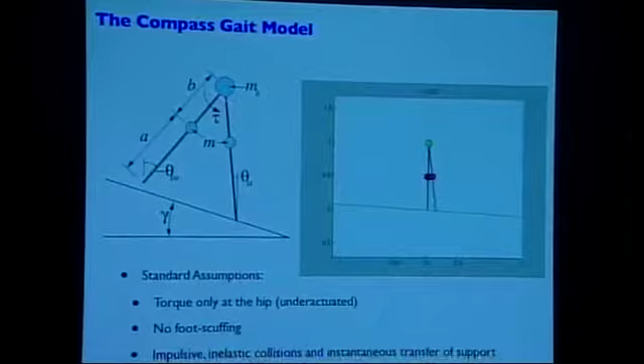And what I want to do today, actually, is try to convince you that motion planning is really central to the way we should be thinking about dynamic walking. And I hope maybe, instead of being on the not list, it makes it to the things we do talk about every meeting. We'll see. But I want to try to make that argument to you by using the model we all know and love and we've been talking about a lot this week. So your standard compass gait model, which, as we know, has a stable limit cycle down the ramp with the standard assumptions. I have only torque at the hip, so no torque at the toe.

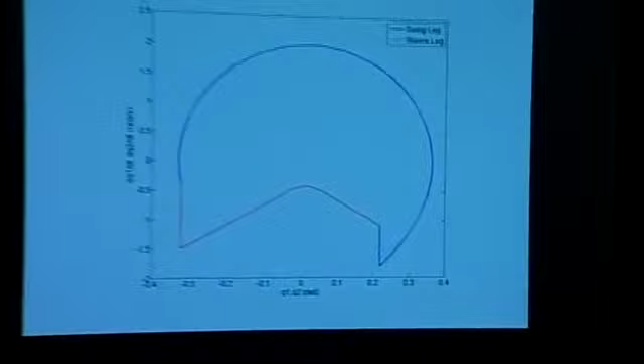Okay. Let me tell you about why you need motion planning, maybe, by just trying to articulate what I care about from the control system, my goals for control. So the first thing we should have, I guess, is this is the nominal limit cycle of the compass gait walker. We've seen it a couple times now. The first thing I'd like to do is make this nominal gait very, very robust to initial conditions.

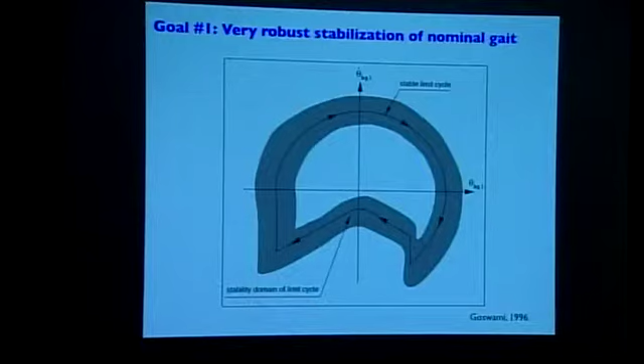So right from Ambarish's paper many years ago, he cartooned the limit cycle of the compass gait, and we all know that the passive compass gait is relatively fragile. It can only recover from small initial conditions. And we've got a lot of good control approaches now for making that bigger, but I really want to fill up the entire space as much as I can with the control system. I want to have it as robust as the system is capable of being.

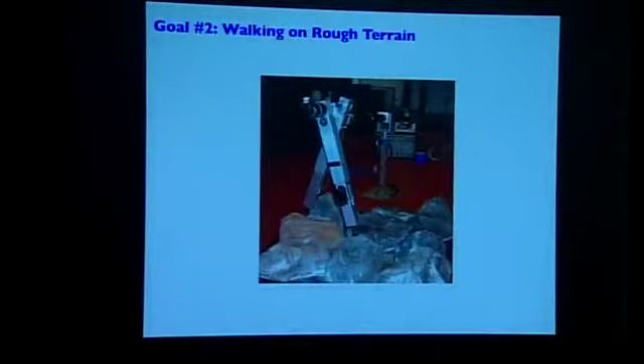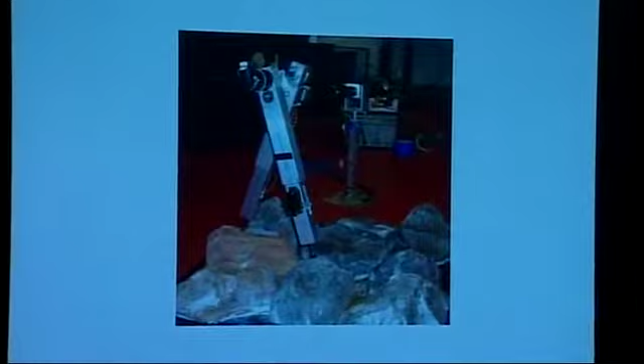A second goal for the control system would be to walk on rough terrain. And this is a picture of some work that Fumiya Iida had done in our lab. And Katie Byl was also working on walking on rough terrain. And that certainly motivates motion planning. And my third goal for these walkers is efficiency, but really it's a distant third. I think that my answer to efficiency is maybe about what Jesse said too, that we get the stability first, we'll use trajectory optimization to get the most efficient gait we want to stabilize, but I think first you have to be stable and then we'll worry about efficiency.

Okay, so why are those challenges hard? And we've heard it in a couple different varieties. Here's my answer. So the reason I think walking is hard to control, it's not hard to stabilize, Andy, but it's hard to control very, very well because of the dynamic constraints. First of all, we've been talking about underactuation, which means you can't follow arbitrary trajectories, but maybe an even more dramatic constraint are the power limits at the actuators, which manifest themselves as either torque or speed limits or both. And those can really, really dominate.

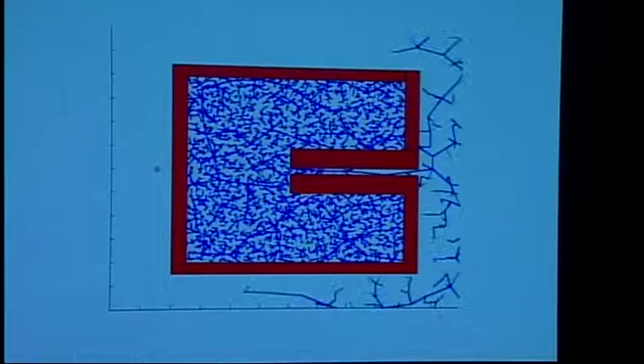So rapidly exploring random trees, and I'll tell you how they work, but this visually will tell you how they work. They're more exhaustive computational approaches that try to fill a space with feasible trajectories and will eventually find their way outside of even a bug trap and make it to a goal. And these algorithms, unlike the trajectory optimization, throw out optimality at first blush. People have been trying to put optimality back in.

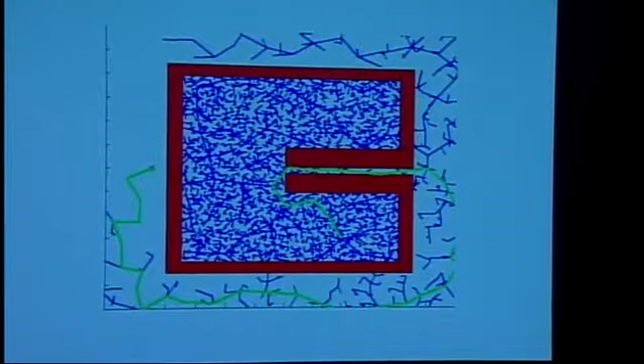But they have strong notions of completeness, saying that if it's possible to get from some initial condition to the goal, then this will actually eventually find that path, or at least with probability 1 as time goes to infinity. Okay, so this is a good set of tools to add to the library. Now this is not much dynamics in this example, but let me show you that it does work with dynamics too. Okay, so here's the basic algorithm. You can understand it very quickly.

And this algorithm does exactly what I showed you on that last slide. It'll start quickly populating the space with these fractal-looking trajectories, and will find its way eventually through nooks and crannies and get you to the goal. Okay? And the immediate knee-jerk reaction that I hope you have is that there's no way that's going to work in high dimensions. And the answer I can give you is only anecdotal, but it surprisingly works well in very high dimensions.

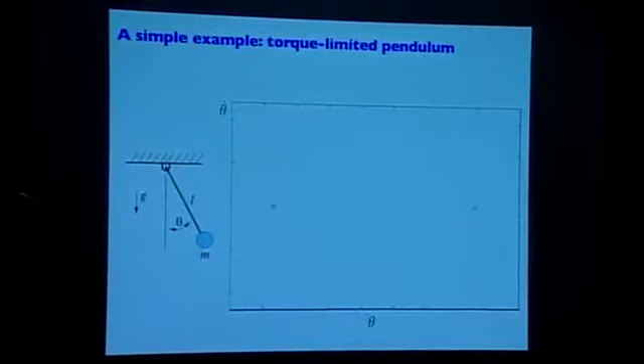Okay, so I gave you a pretty kinematic example first. Let me give you a more dynamic one, although a very simple one. Imagine now a simple pendulum with a torque at the base, and we just want to take this simple pendulum and swing up and balance at the top. But we're going to impose torque limits, for instance. Now this actually you could probably do with trajectory optimization. With a good initial condition, your trajectory optimizer might find a very good path straight to the top. But let's say we want to do it with a more complete method.

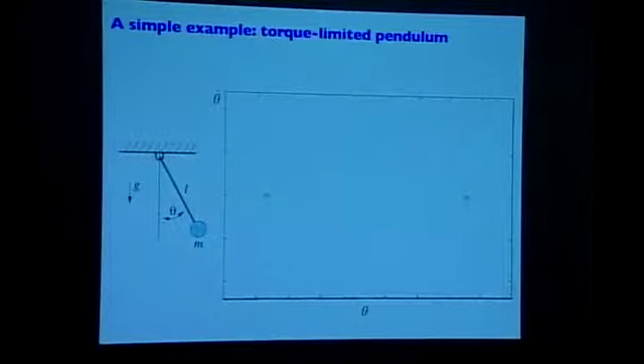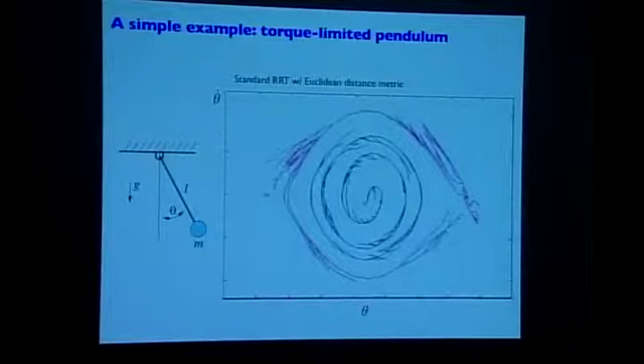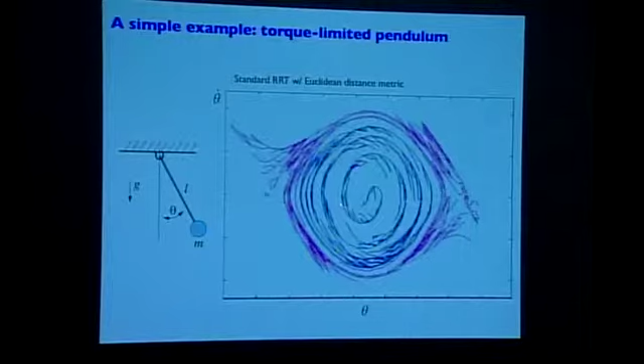So we can take that rapidly exploring tree and grow trees. In the good cases, you tend to grow them backwards from the goal as well as forwards. This is the state space of the pendulum, theta versus theta dot. This is the down. This is the top configuration wrapped around because it lives on the cylinder. Okay, and these trees will grow out in random directions. And because every edge of the tree represents a feasible trajectory, it naturally starts expressing the dynamics of the system, right? So this is the eyeball that you all know and love from a simple pendulum. This is the natural dynamics of the system expressed out of a very random algorithm, okay? And they'll eventually connect up and find you a path, if it exists.

Okay, but actually the initial algorithms as proposed don't work that well. And in fact, if you spend enough time doing it, you look at it and you see every time you pick a random point, it kind of picks the wrong node to expand from. You start feeling it's pretty inefficient. There's a lot of things that could be better about it. So there's been a handful of work we've done and other groups have been doing to try to make them work better for systems with dynamics living in state spaces, which have natural tendencies to, for instance, go clockwise around the phase portrait. And there's a number of heuristics that you can do.

So you can try to improve the way that you sample random points. You can try to improve the notion of which point is closest. You can try to extend in a way that's more natural. And we've been exploring all of these. Let me tell you quickly about two of them. So Alec, who's in the audience here, has got this very clever trick for changing the sampling distribution. It's very inexpensive to implement, and effectively the problem with growing these things in state space is you end up trying to grow in places where you just can't get. So for instance, you just keep asking it to get to the top and it's only got enough energy to live down near the bottom, and it's annoying.

So what Alec has done is come up with a way to sample only from the green regions in this plot, which are a local estimate of places where the pendulum can move in a few samples. And it's a moving target, but we come up with these sort of moving sampling distributions which guide the expression of these dynamics so that they're considerably more efficient for dynamical systems. How do they choose the green tree?

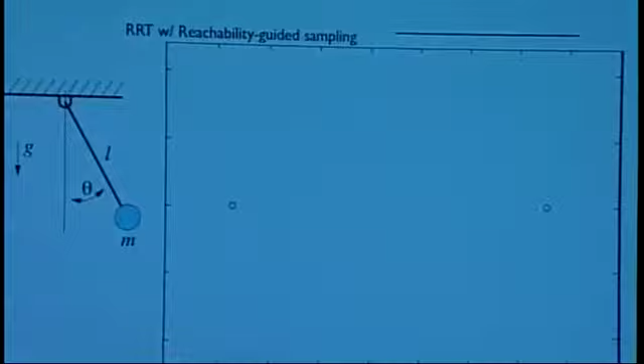So actually he grows two trees. He grows the nominal tree that you're planning with, and then every time he expands, he has some local estimate of the reachability for that node. And if you're closest to the boundaries of your reachable set, instead of closest to the existing tree, then you're in this green Voronoi region, which means you have room to grow. Yeah. And this is the growing oscillations you're showing there. It is, it's for the pendulum case.

It's being pumped. Yeah. And why is it trying to pump up instead of pump down? It's just trying to sample new regions that it hasn't been near before? That's right. It's biased. There's much higher probability of sampling from a place that's not near the origin. So it has this natural tendency to fill the space.

And then actually after that has happened, it's got this nice property that random samples are just as likely to extend the ones that are close. So these things sort of fill the space quickly and then fill in the details later. If you watch them enough, it has that behavior. And little tricks like this can make a big difference to the performance of the algorithm.

Okay, so Alec's version of the simple pendulum plotted versus just a standard RRT. This one cruises right up and finds a goal. This one's still just getting started. And there's a handful of tricks you need to do. All I mean to really say is that with a little bit of tricks, you can make these things work very well with dynamical systems. It works. Alec can also solve these bug trap problems in a blink of an eye in a few trajectories using similar kind of heuristics.

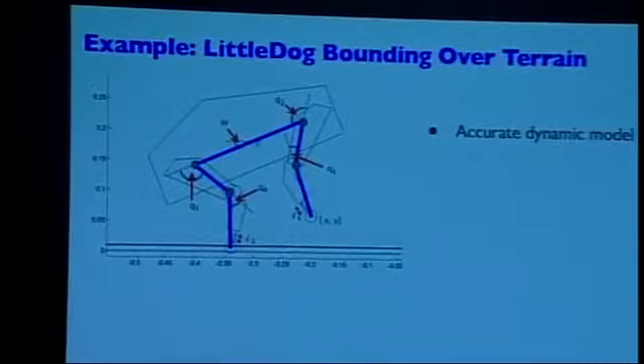Okay, so let me show you a harder example. So we can do this, for instance, on Little Dog. So we take the Little Dog model. We spent also a long time doing system identification for Little Dog, but we came up with a pretty good model. I'm not sure if we'd say we like it as much as yours, but we came up with quite a good model. It's a planar model, so we just ignore the out-of-plane dynamics, a 5-link model. We model the ground reaction forces very carefully and the dominant effects of the saturations at the joints and the reflected inertia of the motors.

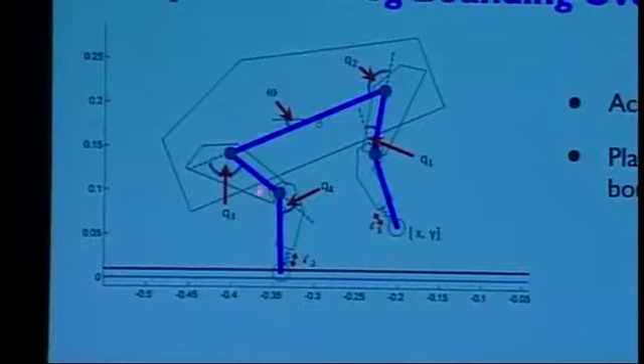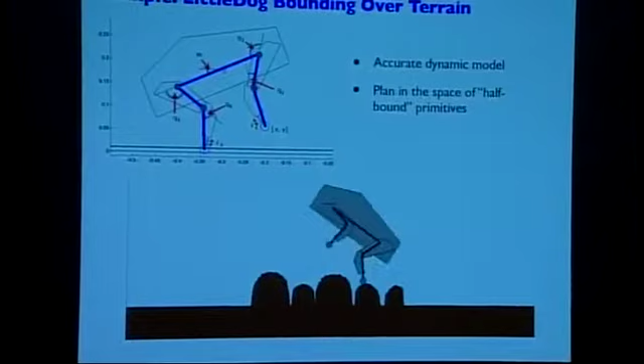Okay, and then we plan in this high-dimensional space. It's a total of 14-dimensional space that we're planning in. There's some primitives that we use, so we plan half bounds at a time. And we can now take Little Dog and very quickly plan pretty complicated trajectories over surprisingly non-convex terrain. So this is just a system. It says you've got a robot. It's described by these following dynamics. It's got these kinematic constraints. Initial conditions here. Final condition is here. Go to it, and it fills up the space and comes up with a trajectory that gets you over the obstacles.

Do the actuator limitations in the simulation match the real world? Oh yeah, we spend more time on that than anything. That absolutely dominates. And actually, we do delays in simulation and everything like that too.

Okay, so another key idea is to improve the way we do the extend operation. So for instance, everything you learned in trajectory optimization the other day: nowadays, every time we do a little extension, instead of growing some epsilon towards your goal, we actually do a trajectory optimization during every extend operation. That makes a huge difference. Okay, but the take-home message is really that these randomized algorithms can find solutions in pretty complicated dynamic problems.

And the practical way you see that is just when you start integrating back the solutions for this, the numerics of the problem are very, very bad. And you take out one dimension and suddenly the numerical conditioning is very, very good and the controllability and the system works much, much better.

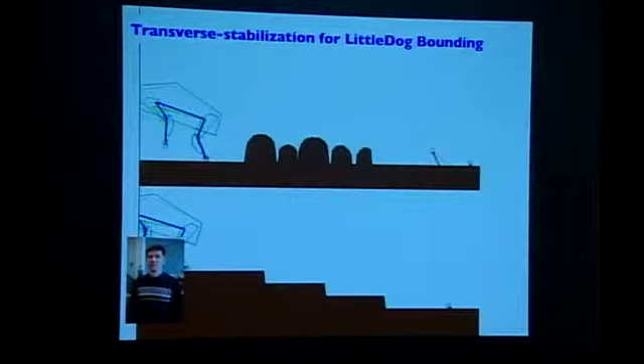Okay, so Michael's been showing you can do the transverse linearization even on these complicated models on Little Dog. Now you might be able to guess this is the one that wasn't transversely stabilized. The green one I think was the original and the blue one was the stabilized one. Okay, so in pretty complicated regimes, with that one, by the way, the dog is getting perturbed. There's an adversarial perturbation. Every time the foot hits the ground, someone's trying to throw it back up with some pretty big perturbations, and there's delay in the model and everything too. And it's still very robust. Much more robust than our initial attempts.

Our use of transverse linearization is just a little bit different than what Anton said. We don't typically use the trick of virtual holonomic constraints yielding analytical transversal coordinates. We do transversal coordinates designed numerically, and we actually spend a lot of time optimizing our choice of transverse sections, but that's maybe a detail. Actually, Anton made some nice points about how if you have it analytically, that can help with the robustness analysis. We don't do that yet.

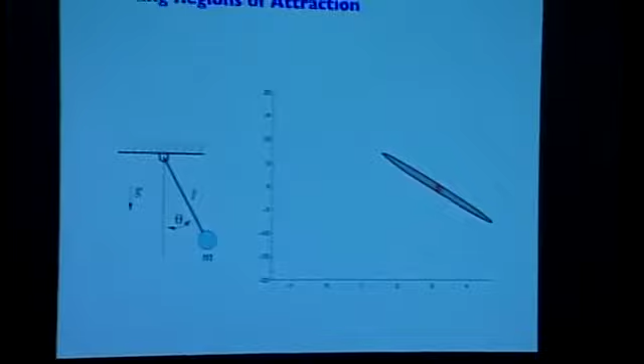Okay, the third tool, I don't know, how many tools have I had? Fourth tool maybe is estimating the regions of attraction. That was prompted nicely by Bobby and other speakers. It's a really, really nice tool to be able to efficiently estimate the regions of attraction of these systems. So let me do it on the pendulum example again.

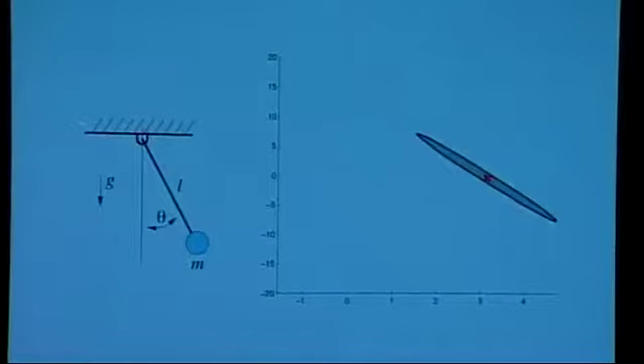So the simple pendulum, if I were to swing up and stabilize this at the top, let's say I just put it at the top configuration, which is pi 0. Is that 0 to you? Maybe my perspective's wrong. That should be at 0 though, okay. So pi 0, so I stabilize the system around the upright. I'll just do it with an LQR, a linear feedback design. But now I want to estimate the region of attraction of that linear controller.

So you know from intro controls that the linear controller works great up here. If you start moving too far away, the sine theta term in the pendulum means that the linear control stops working. So at some point it fails. Actually, the region that it fails is not symmetric because it's better to be over here with a velocity going this way than over here with a velocity going this way.

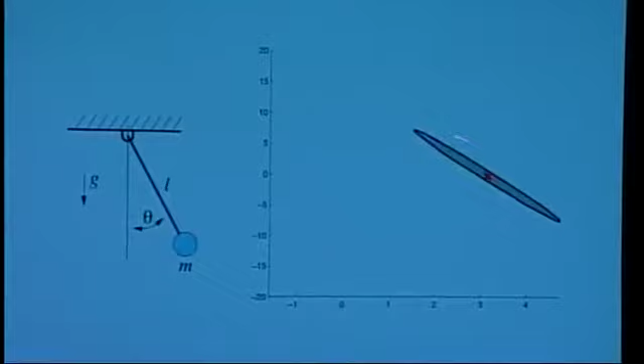It's not a perfect ellipse, but we are going to make our best ellipsoidal approximation of the initial conditions which, when running a linear controller on this nonlinear system, make it up to the goal. And the surprising thing is that we can get that estimate very efficiently now. And here's how that works. So we're going to estimate regions of attraction for linear feedback.

So given a differentiable plant, we're going to linearize around the operating point. We're going to use our LQR design to get a linear feedback. But LQR design also gives you x transpose S x, which is the cost to go for the linear feedback. So if you were running the linear feedback on the linear system, this function is always decreasing. The cost to go will always go down, which makes it a valid Lyapunov function for the linear system. It's a proof of stability for the linear system.

And to estimate the region of attraction, we're going to ask for what region of state space is this Lyapunov function still a valid Lyapunov function for the nonlinear system. So we're going to look for the largest level set of this quadratic function, parameterized by rho, for which all x inside that rho have the property that we're going to go down the bowl. I'll show this visually in just a second. So this is a bowl around the origin in that ellipse. We're going to find the biggest level set for which this Lyapunov function is a valid one for the nonlinear system. And it turns out it's surprisingly efficient to do this exactly.

It can be formulated with an affine objective over the convex cone of positive definite matrices using sums of squares optimization. I decided to yank the slides that get really into the details of sums of squares, but basically this means that you can formulate a semi-definite program that will exactly tell you the solution without any local minima using very good convex optimization tools. You're not showing saturation there, but you do it in the optimization? Yeah, that's right. So we add saturations also.

So we've been extending the sums of squares region of attraction estimate to doing stabilizing trajectories. I'll show you that in a second. We're doing exact verification despite inevitable errors in the numerical integration. Just that we're doing this right, I think. We've got good tools for doing it with trigonometrics exactly without doing the Taylor expansion, okay? Which nobody in controls would be surprised about, but the tools just weren't really there. And Ian's going to tell you on Saturday that we can do the region of verification exactly for limit cycles with impacts.

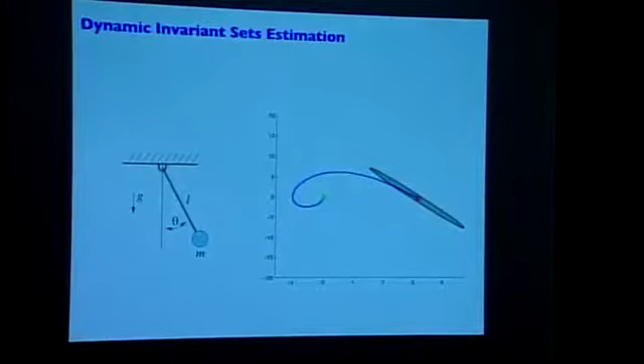Okay, so here's how it plays out. Being able to estimate the regions of attraction, in my view, changes everything. Suddenly we have a really nice tool for motion planning. So now let's take the simple pendulum. We're going to start it in the downward configuration. We already know how to stabilize it at the top. We designed a linear feedback. We estimated its region of attraction. Now we're going to do trajectory optimization to figure out a solution to get me from the bottom to the top, swinging up and balancing.

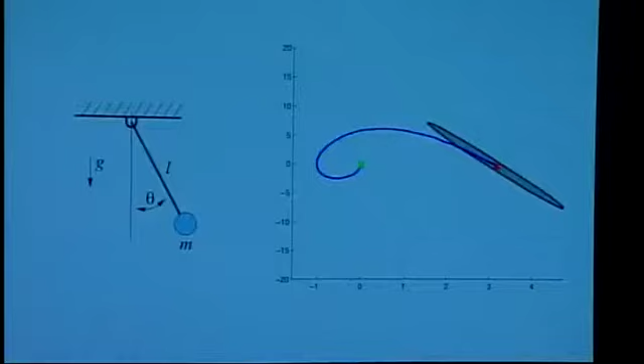But I'm going to now do two extra steps. I'm going to stabilize that trajectory with a linear feedback, time varying or transversal linear feedback. And then I'm going to compute this invariant set around this trajectory. It's an invariant set in the extended state space, to be careful. And it's a tube that says any initial conditions which start in this tube are going to stay in this tube, and they're going to find a way to the outlet of the tube. And as long as the outlet of that tube is the inlet of this tube, then I've got a proof that I'm going to get to the top.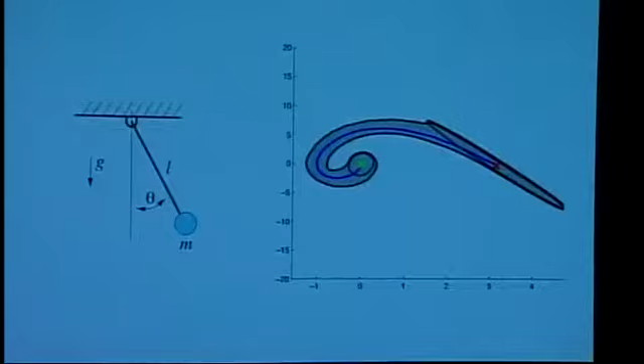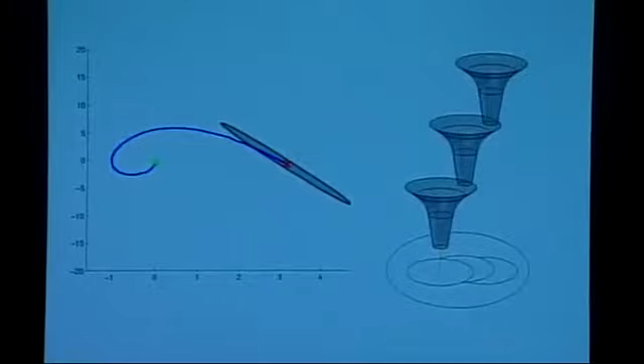And you can think of it like the funnels that we've been seeing a lot. Each of these tubes that we're verifying are exactly these funnels that we've been thinking about in controls for a long time, and now we have good tools for calculating them. And as long as I have my funnels leading into other funnels, then I have cascaded plans which get me to the goal, with exact proofs of stability if we care about that. And these funnels give you a really nice way to do fast planning online, because suddenly you can throw around funnels, these abstract objects, instead of having to do real-time motion planning with just trajectories, for instance. So this is my nice 3D animation of the funnel.

The funnels have been around for a long time. They're credited to various people. I learned about them honestly first from Dan et al.'s paper, which I think is fantastic. They cited Mason, and Mason says I shouldn't credit him at all. Every time I see him, he says, I don't know why you give me credit for the funnel idea. First of all, everybody knows about funnels. Second of all, I don't think I even came up with it. I probably learned about it from Mark. So this is sort of citation in progress. But funnels are a good idea, and everybody likes them.

So the cool thing is that really gives you a really good tool for motion planning. So here's my rapidly exploring tree for feedback motion planning. I'm going to pick a point at random in state space. I'm going to design a trajectory that gets me back to the goal. And then I'll stabilize it and compute the funnel. Now I'll pick a new point in state space. If it was already inside the funnel, I'm done. No need to add it.

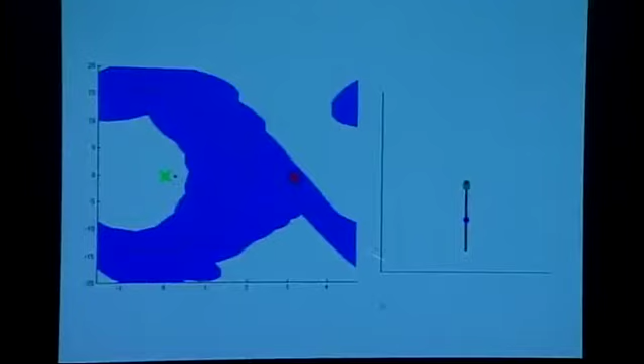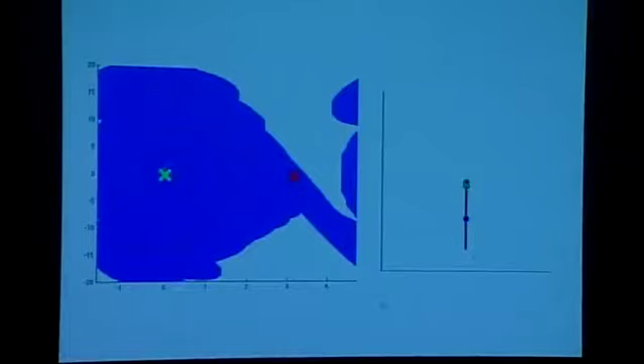If it's outside, I just need to design a trajectory with a final value constraint that says it has to land somewhere on the existing tree. And I fill that in and stabilize that. And what happens is after just a handful of trajectories, you can fill the space with motion plans that guarantee every initial condition finds its way into the funnel. And the cool thing is it only takes a handful of these trajectories to fill the space, at least for low-dimensional systems. Not particularly impressive, but we can swing up a pendulum and balance it.

The algorithm, taken from the rapidly exploring tree kind of literature, has strong properties of coverage. So now we can say it probabilistically covers the controllable space with stabilizing controllers. So what does that mean? That means if there was some region of state space which wasn't inside the funnel to begin with, we'll eventually sample it. And if it's possible to get it back to the tree, we'll eventually connect it back to the tree and cover it with a funnel.

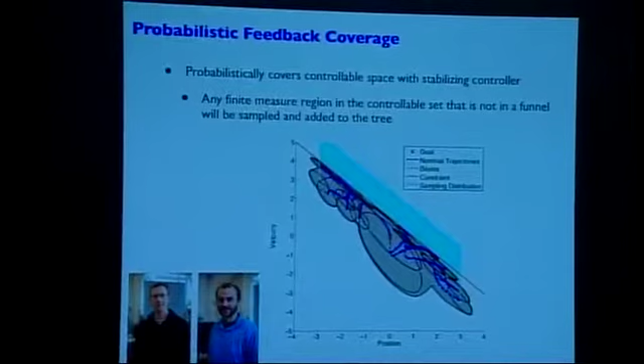So that means any initial condition that can reach the goal will eventually be inside the basin of attraction of our controller. Okay, that's pretty cool for even complicated nonlinear systems with saturations and constraints. And here John cooked up this nice example, where he designed a system that, because of input limits, had a known region where it could never possibly recover from things beyond this region of state space.

The goal was here. He sampled over this cyan region, and what the algorithm did, because we're using ellipsoidal regions, it just started populating the wall of this region closer and closer until it could fill every possible region to cover the space and get it to the goal. Obviously, if we used non-ellipsoidal regions, we could have maybe done it more efficiently, but this just shows what it does. If there's some gap there, it'll eventually grab it and add it to the tree.

Okay, so it was sort of hard to implement. That's actually, I think, the downfall: it was pretty hard to get all this stuff working. So we had to do a lot of work with numerical optimization and conditioning problems, and we now use Sasha Megretski's tools for the sums of squares. Lots of numerical massaging, trajectory optimization methods, and we do robust verification inside this, sometimes in the control design, but mostly just in the verification.

So we're trying to release a version of the toolbox for MATLAB, if you guys want to try it. Now, because it uses all these tools, it's been a little bit of a pain handing it to people. But if you're willing to try, then I'm willing to try to help you install the tools and get it working. Just send me an email.

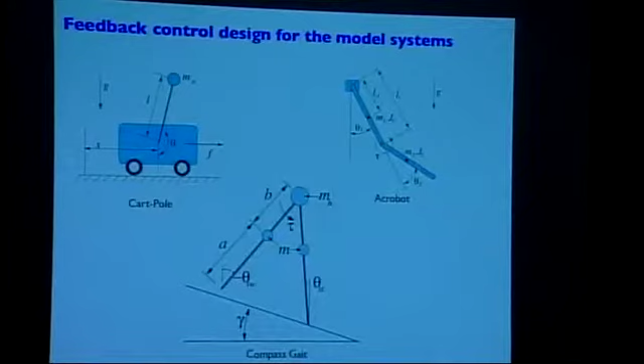Okay, so I've been thinking for a long time about all these underactuated systems and how to design controllers for them. And I don't want to say that they're solved. There's lots of things that we can do. But any of these systems of this complexity now, we just hand it to the same algorithm and bang out controllers that will fill the space. Every initial condition that can get to the goal will get to the goal with some proof of stability.

Now, when I first talked to Mark Spong about this, he pointed out immediately and correctly that things like energy shaping on this are very robust to parameter errors and things like that. And that's absolutely true. If I design a linear controller in some metric space that was not robust to parameters, then I'll get a small funnel, right? And if I use the right representations, I'll get a big funnel. And energy shaping is almost certainly the right representation for these guys.

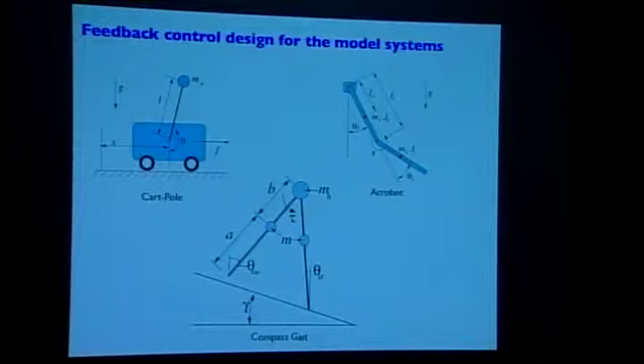So there's work to be done. It's not to say they're particularly efficient. They could be more efficient. But we can, for systems of this complexity, bang out controllers that are as good as they need to be, I guess. This is just an example on the cart pole.

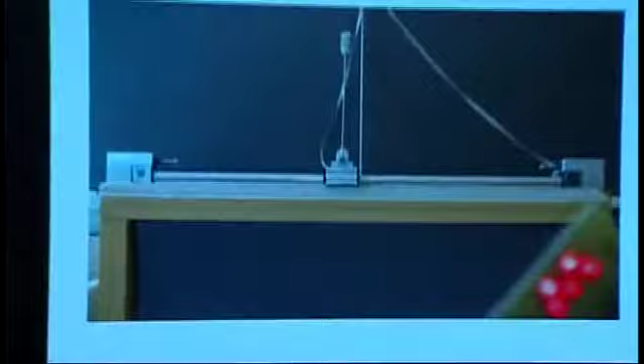The light's going to turn on as soon as the controller turns on. There's constraints on the travel, which make it a little bit tougher. They're all handled exactly in the algorithm, and we can now get back to the top no matter what you do to the pendulum. How many regions for that example, say? 42 trajectories, I believe. Yeah.

So it's pre-calculated based on the known dynamics? Yeah, we model the system. I'll talk a little bit about the dependence on the model at the end. So is the trajectory trying to get to a point that you pick in advance, or are you just picking at random?

So we label a goal, which is in the middle upright for that cart pole, and everything's trying to get back to that. But when you grow one step in the tree, you try to grow back to the existing tree. The final value constraint is to the manifold, which is the tree, and you're allowed to walk along the tree. Okay.

But you're in my lab, you can ask me later.

Yeah. Okay, so now we can do it for the compass gait. We can do it for limit cycles with impacts. And Ian's, it's a nice combination of what Anton was telling you and all these sums-of-squares tools, and the story I think is beautiful, and Ian is fantastic. So he's going to tell you about that on Saturday. But this was really, really exciting to me to be able to do it exactly for limit cycles.

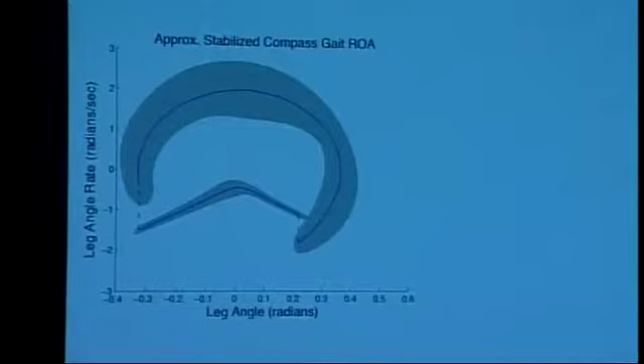So a lot of times our proofs of stability in walking have been limited to when we can integrate across the entire Poincare map, and now we can do regional statements of stability without having to integrate exactly. In practice, to be faster, we don't do the exact solutions. We end up doing sampling along the trajectory instead of exactness along the trajectory, but we have all the things lined up to do the exact thing if we really needed to.

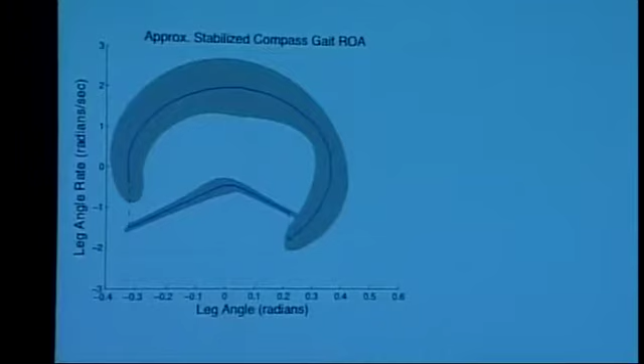How do you do LQR with non-smooth dynamics? So we do it on the transverse coordinates to get the orbital stability, and then it's just a jump Riccati equation through the discontinuity. Yeah.

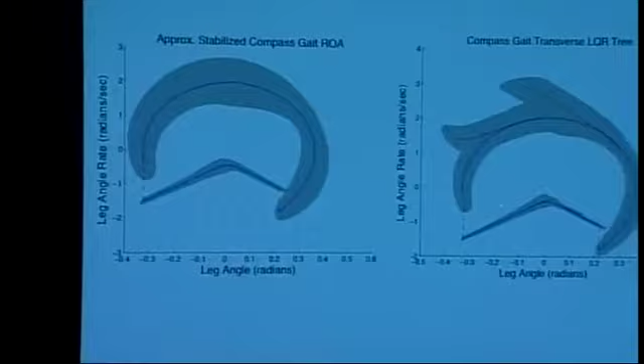Okay, so then the way I think we should do walking is we should do this, and this is the thing that I think we've got a lot of good tools to do, is to stabilize the nominal limit cycle, and then we just do a little bit more. Now that we've computed this region of attraction, we can start adding. We just grab a new initial condition that's outside the region of attraction, do trajectory optimization to design a motion that gets you back to the nominal limit cycle, stabilize that, compute its funnel, add it to the tree.

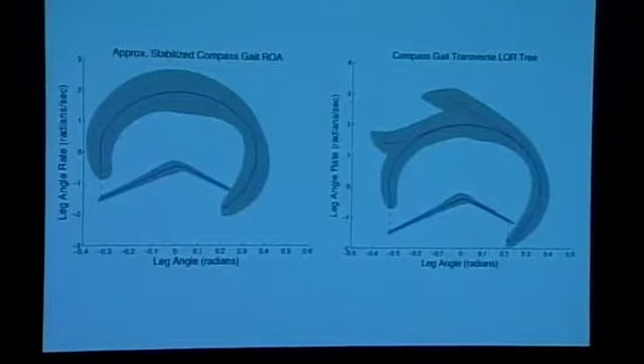And the claim is that after you grab a handful of these recovery motions, then you'll quickly fill the available space so that initial conditions where the compass gait can get back to the goal, it will get back to the goal. Okay, so, and the effect is, this is the trajectory library, the thing that Chris has been saying forever, and we now are in the same camp of believing in these.

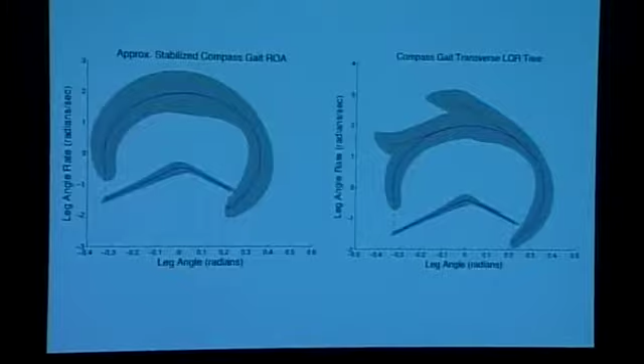So maybe you just need to have a handful of sort of recovery motions. Maybe me as a walker, I just need to have a handful of recovery motions, and I can use those in a lot of situations. The situations I can use them for are computed by these funnels, and just fill the space with a handful of motions. And I'll fill as big of space as I can.

Okay, so like I told you in the intro, we built this biped to try to show that we could do it in real life. And it walked for the first time on Wednesday. Zach's a fantastic designer, and he's going to bring it over a couple times so you can see it. But it's a work in progress, and so soon you'll see the LQR trees working on this.

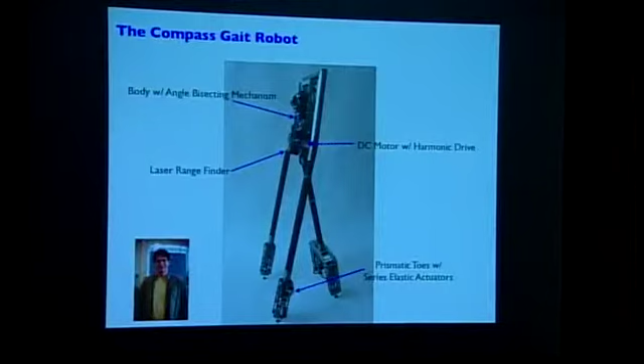Okay, and it also works for other systems. I just want to say quickly, so I really like the control ideas, the general dynamics ideas that aren't just for walking. Walking's fun, I love walking, but it should be bigger than that, right? So it's cool to say that the same algorithms work for other systems.

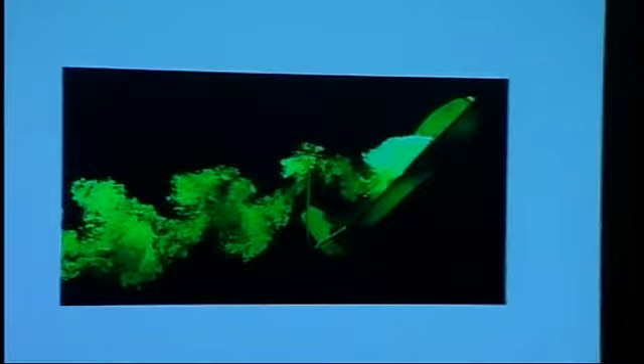The other one we've been thinking a lot about is these perching aircraft, which are difficult because they're in a complicated fluid regime. If you try to land on a perch like a bird, then you go into this deep stall configuration where the dynamics are very complicated, the nonlinear dynamics dominate, the saturations dominate. So it's really hard for a lot of the same reasons as walking, except for impacts. Well, I guess we impact the perch, but we ignore that, yeah.

And the same sort of algorithms can now make us go up and build these planes which can stall their wings and land on a perch. We did this initially with dynamic programming solutions, but we're doing it much more successfully now with basically 100% success rate using trajectory stabilization and a form of the LQR trees. And it's a robust phenomenon, so this is just another trajectory of it landing on the perch.

And we're collaborating with Mark Cutkosky to put some spines on there. We can land on a wall. The Air Force wants to land on a power line. It's been a good thing to think about, yeah.

And the way it works is exactly like the story I said for walking. So we design a nominal trajectory from an initial condition. We compute the stabilizing controller, compute its region of attraction, or estimate the region of attraction, and then try to fill the space with trajectories that get us back to the goal, right? So we can be very robust to a lot of different initial conditions.

Okay, so it's a very model... Oh, sure, yeah. Does your model change as it approaches? We did a system identification procedure. Rick did a system identification procedure where he shot it about 200 times and tried to comb the set of states that it could possibly enter. Built a model once, which was a surprisingly simple model, and then we've used that for all the experiments.

So far we haven't gone to the point where we needed a new model because of the new trajectory. But we can add in, we haven't done it for the perching, but we can add in, if there's uncertainty about the model, if there's known modeling errors, known unknowns, then we can add that in and compute the funnels that are robust for that entire family of models.

Okay, so I think verification plus motion planning may enable rigorous and practical feedback design for non-convex problems in robotics. Legged locomotion, we're trying it in manipulation, we're trying it for other systems as well. And I think the real thing about these funnels, for me, apart from proving stability, is that it allows you to build sparse trajectory libraries. So we can achieve performance at the limits with strong theoretical guarantees.

And now, Andy, after the tutorial yesterday, said, compared to 5 years ago, I think a lot more people around here are pretty optimization savvy. The number of people here that use optimization tools regularly seems to be going up, okay? So let's hope that maybe in 5 years, as we're talking less about limit cycles and more about walking in general and walking on terrain and stuff, maybe we could say the same thing.

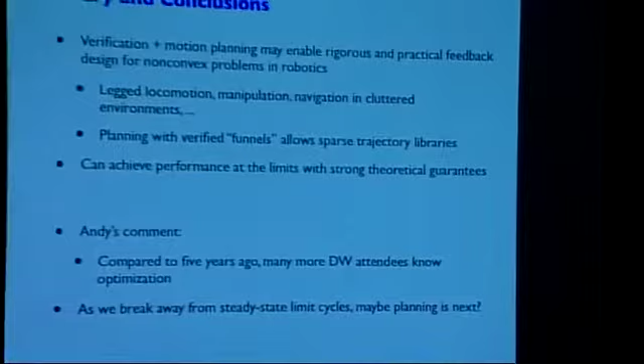Maybe planning's next, I don't know. Maybe that's optimistic. Hopefully you're all using RRTs, I guess, in 5 years. Okay, so just a teaser at the end here, but Rick's trying to do this perching with flapping wings now. We just started getting this to work, and we've been building robotic birds. But lots of fun things you can try to do with this sort of control.

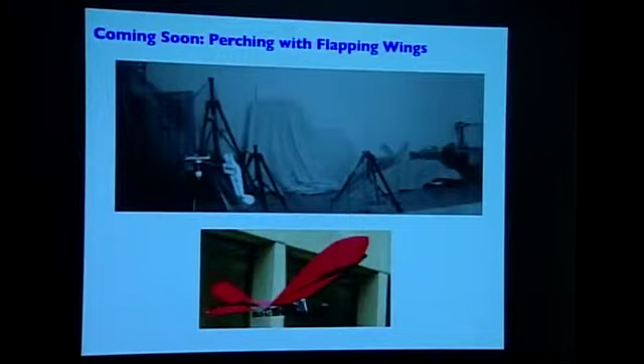Question about sums of squares. The Lyapunov-based approach is usually sensitive to the dimension of the system. So you have 5 states and it doesn't work? Could you repeat the question? Sorry, good. So the question is, how well does sums of squares scale to higher dimensions? It's the most sensitive to dimensions of all the parts of the algorithm, no question.

So we've done 6 degree of freedom satellites, so 12 states with quadratic Lyapunov functions. Ufuk Topcu says he can do 14 dimensions with quadratic Lyapunov functions. But that's probably the limit where we're at. We're probably 10 to 14 before it really starts choking. We tested that it's up to 20. You got up to 20, good, so I'll cite you from now on. So 20 sounds better. But it's not going to be 100, I think, anytime soon.